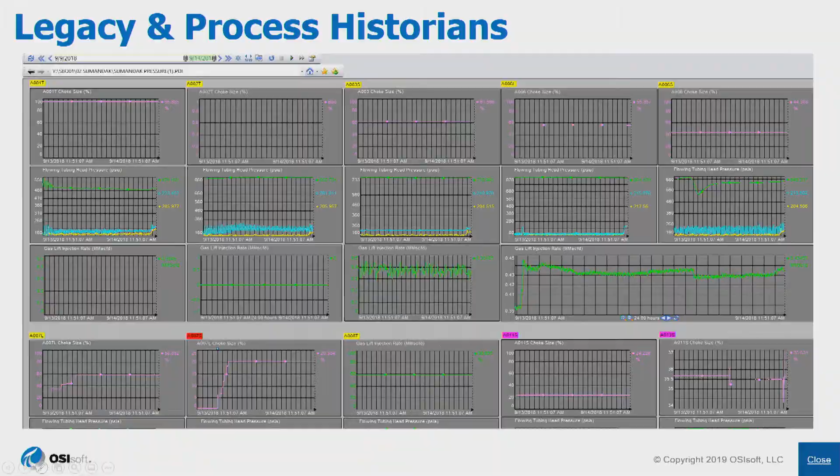And hopefully we would all look at this — even though I fully recognize that engineers love this kind of stuff and try to make these screens as big as they can with as many graphs — hopefully we would all look at something like this and go, it's not a very interesting way to monitor our facilities and get the most out of real-time data.

Okay, so the industry evolved into, in this case, what I'm talking about is something like a typical real-time refinery. And we could substitute the word refinery here with an upstream operation, a gas plant, or any kind of large industrial operation. But in this case, I'm talking about a typical real-time refinery.

And I think some of the examples we've been talking about this morning kind of resonate still with this picture, which is where a lot of the industry — although we may want them to be doing even more advanced things with real-time technology — I think it's fair to say a lot of the industry is still at this point.

So what are we looking at here? Lots of pieces of equipment that we're all familiar with generating real-time data — sensors, pieces of equipment generally connected through our process control environments and being collected into your Pi data historian at this point. And I use the term historian deliberately.

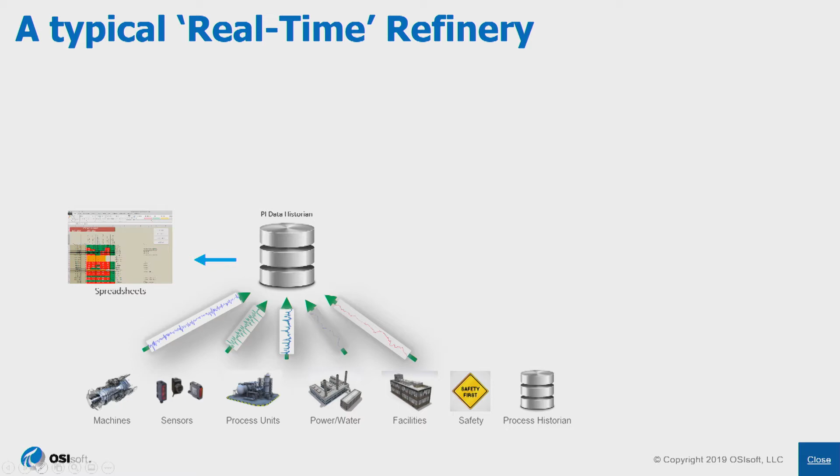And typically what we see in this kind of environment is our engineers coming to this historian database and exporting a lot of this information into Excel spreadsheets, spawning these like bunny rabbits all over their operations. And we also see, interestingly for companies like OSIsoft, our oil and gas customers going out to market and buying a whole range of specialist applications that they use to monitor their refinery, monitor their upstream operation, and link together with this real-time data, okay?

We've talked a lot today about integration between Pi technology and Sigmafine and how we can take our real-time data and stream it into this platform, and do mass balance calculations, energy reconciliation, gas transmission reconciliation, all these wonderful things we may want to do. This is a really big part of how the Pi technology has been used.

On top of that, as you're all aware, we provide within OSIsoft our own range of tools for DCS mimics, that kind of stuff, and process trending. So if you want to have a look at these trends in this kind of environment, you can.

Does anyone have any questions about this? Hopefully this will resonate with a lot of the room, and we all recognize this is a kind of thing that we've all been doing.

But the industry is increasingly interested in doing a lot more with things like analytics, modeling, digital transformation, all the terms we've been talking about. So when we look at this kind of traditional setup, which I think is probably going to be familiar from a lot of your refineries, there are quite a lot of challenges.

So what's the first challenge? Well, apologies to Sigmafine, because I would put them in one of these blocks on the side. But to us, the first problem with this is all these applications that you as customers are buying manifest themselves as effective data silos in your data strategy.

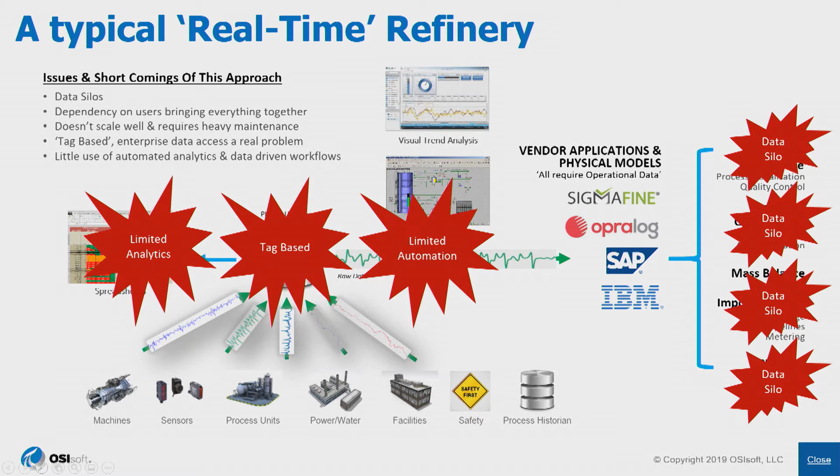The third problem is that within our real-time technology at this point, we have limited use of any kind of analytics or automation. So although you've got very sophisticated analytics, calculations, simulations, modeling in all these specialist tools, there'll be an awful lot of stuff you want to do centrally within your real-time data platform that in this kind of application you're not doing.

The sort of thing I'm talking about is, is a pressure rising too quickly? Is a temperature falling too slowly? Am I inside or outside of an operating window? All those kind of problems - things that engineers want to do at very high volume, at very high velocity across our industrial assets. In this kind of world, there's not much of that happening.

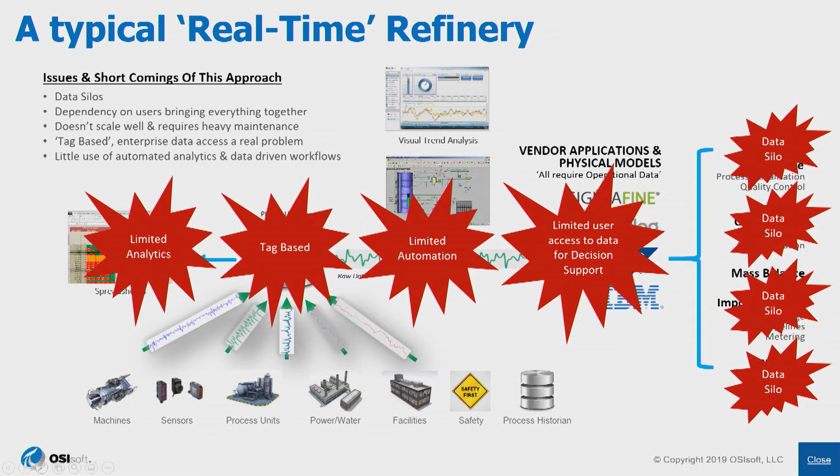And the final problem we've got here is that the engineers are still very, very dependent on third-party applications to do the things they want to do. So we believe within OSIsoft that actually the right strategy is a combination of specialist tools that they're going to be buying, but also giving tools to engineers that they can build their own solutions and complement the kind of sophisticated things they're getting from Sigmafine with maybe simpler things they may want to be doing to monitor pieces of equipment or processes or that kind of stuff. Okay, so we have some problems here.

On top of those problems around how do we move forward with digitization, what we're hearing from a lot of our customers is a growing appetite to do more with real-time data in the plants, in your operating assets. Everybody wants to do more. Everybody is waking up to the fact that if you apply technology in a smart way, you can save money, make things more efficient, make things safer, comply with government regulation, etc.

Whereas we as OSIsoft, if we'd been having this conversation 15 years ago, we would have probably largely been talking about monitoring operations, monitoring upstream production, digital oil field, those kind of things. Now I spend more than half of my life talking about maintenance and health and safety and real-time drilling and logistics and lots of other topics that previously we wouldn't have been talking about.

So the technology landscape is more complicated, and the things you want to do with our technology is more complicated. So we as a company have had to evolve.

Now, several years ago, when the industry realized that it wanted to start evolving, everybody started getting extremely excited about things like big data analytics and data lakes, right? And I can see you all getting immediately excited about the idea of talking about big data lakes and all this kind of stuff. And a lot of the companies that came into the market around traditional technology, like Sigmafine and like OSIsoft, said, this is easy. We can evolve this solution really quite simply. All we do is we stick a data lake on top of all of that, and that will solve all your problems. Just stick all your data into this, don't worry about it, and everything you need to do, all your digital transformations will exist in a cloud platform and solve everything you want to do.

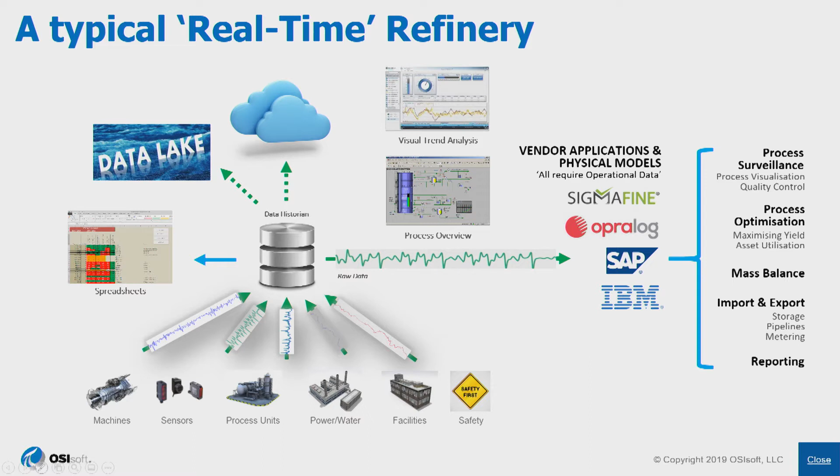But thankfully, we are now 2 or 3 years further down the line, and the industry has spent a lot of money and a lot of time kind of playing around with this in various permutations in lots of different companies. And they've kind of realized that there are still a lot of challenges.

So the first is sticking tag-based raw data, as we've been mentioning a few times this morning, straight into some large unstructured data lake is not a good way to provide access to data scientists or engineers around doing stuff with this data. You are creating even more data silos. So on top of all your application data silos, you're making your company even more complicated because suddenly you are introducing tons more data silos that may exist outside your own company boundaries or outside your own control. So this is a bit of a challenge as well. And there are, of course, significant data management challenges with all this kind of infrastructure and architecture.

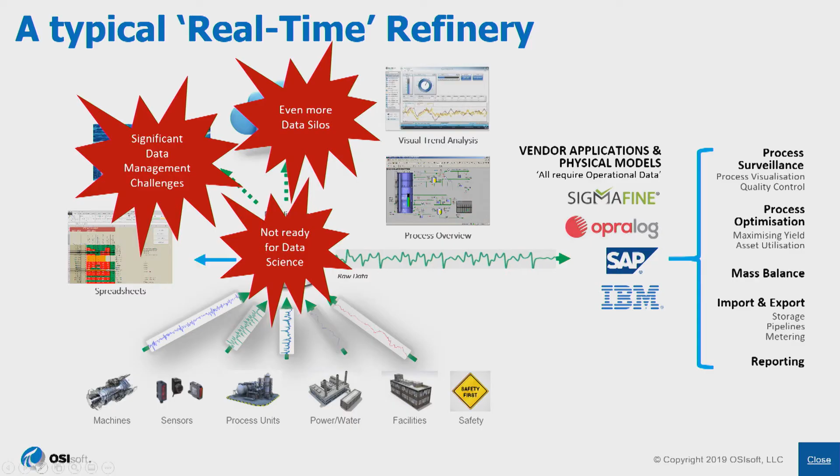Okay, so hopefully I have not painted too much of a miserable vision of the future of everything getting kind of far more complicated and we wanting to do more but struggling to do that. So the point is that we as a platform, Vlad has rightly pointed out, we've been around as a company for 40 years, or very nearly 40 years. We have obviously had to change significantly over that time.

And we've always been a company that's prided ourselves on our close relationships with business and operations users within our industrial customers. So we've listened to what the customer wants to do, and we've looked at the technology trends, and we've evolved our solution to be able to provide you all what we think is the right sort of technology to meet the modern demands within your refineries or your industrial assets.

So how have we changed? Okay, so seen as this is a PIMSoft conference, I'm well aware that you're all very, very familiar with AF, and or, as I like to refer to our sort of operational data model.

But the biggest change that we've made is we've moved away from tags as a way to present this information to most of our users, and we've introduced the idea of data models and digital assets through the use of PI Asset Framework. And we've talked a lot about, and we've touched on themes this morning, and we could spend 2 or 3 hours talking about AF and why it's useful and why it's important. But the essence of this is it moves us away from those raw tags and provides a framework for presenting data to people in a meaningful, structured, contextualized way that we can all start doing things useful with.

But it also provides a framework for data and workflow integrations between different applications, different tools, different systems. So as you want to complement all that raw data that you're measuring with your own calculations, your own formulas, your own references to other systems, your own references to third-party data analytics tools, predictions from models, whatever it happens to be, PI Asset Framework provides you the mechanism to do that.

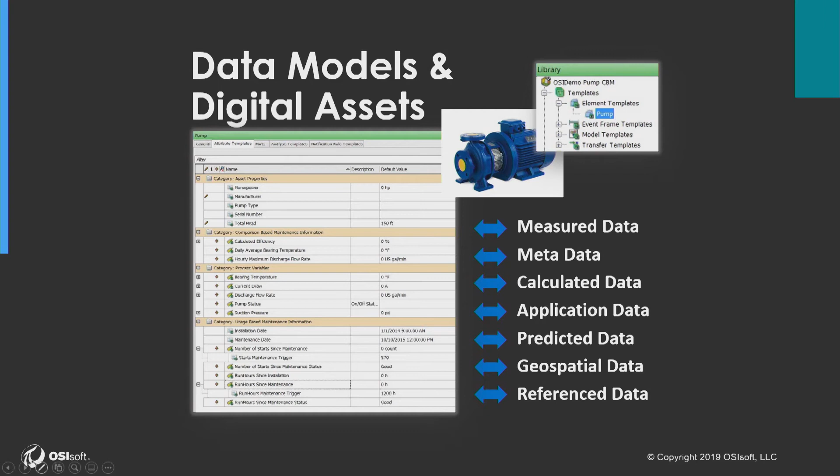Not sure this is working as well.

The second way we've evolved is our visualization tool has changed. We've seen examples on the screen today of PI Vision. To me, PI Vision is not just ProcessBook 2.0. PI Vision does something very different. It's designed to be a platform that engineers, end users, and operations people can configure themselves to start building those kind of decision support tools I was referring to a minute ago.

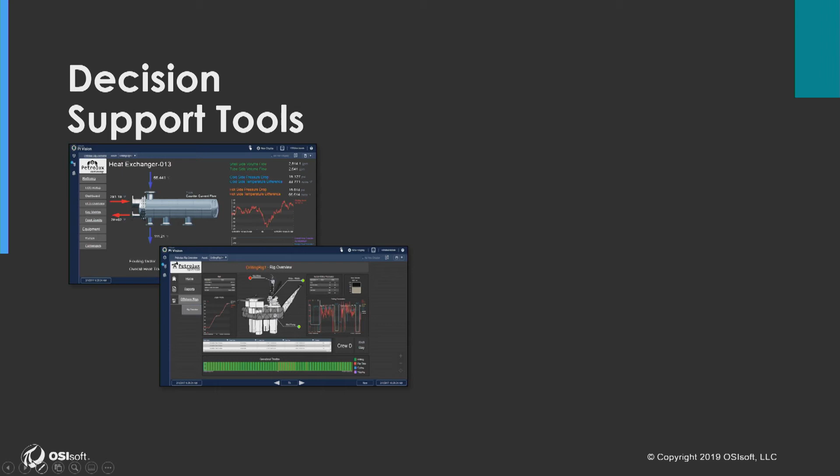So the idea is if an engineer has something in mind that they'd like to do with real-time data, they can use PI Vision in combination with PI Asset Framework and very rapidly build their own solution for monitoring a piece of equipment or working with time series data. That can complement the kind of advanced processing they're doing in something like Sigmafine. So this is an important evolution for us.

The third evolution is that we've recognized that you as customers increasingly want to integrate your systems and tools together. There's a bit of a problem where people spend their time flicking between lots of different applications, so all our technology now is designed in a way that can be quite easily integrated into other visualization platforms, or other tools can be integrated into our platform.

In this case, this is an upstream example from Petronas in Malaysia. The gray box at the top is an optimization model from Petex, and they've integrated that straight into the Pi platform. So the engineer is no longer having to export all his data out of Pi, push that into Petex, do an integrated model workflow for well optimization, then bring it back into Pi. He can do that all together in an integrated way.

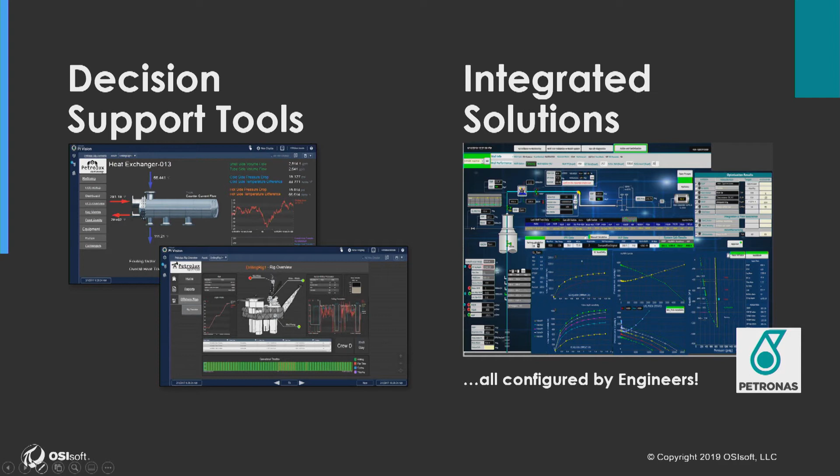So we're seeing more of this kind of stuff, and there are people in the room, like Philippe, and companies like Ipcos who are doing these kind of advanced integrations with lots of our customers around the world. This is an exciting evolution of this kind of technology.

Obviously we have to talk about data analytics, and although there are certain people in the marketplace who would suggest the answer to everything is very advanced machine learning and AI, I think as an industry we've all matured from this perspective, and we recognize that the answer is probably at different layers of different kinds of analytics to solve different types of problems.

We've got very advanced analytics that can help us solve very complex problems and expose insights into data that aren't immediately obvious, but we've also got the need for very high performance streaming analytics closer to the raw data, to help process that data, spot and fix data quality problems, and provide calculations, KPIs, and metrics as foundational building blocks used within those advanced analytics. So we've had to evolve to support different types of advanced analytics around the Pi system.

We've had to evolve to interface with all the business reporting tools, things like Tableau and Power BI. As a company we really don't mind what you work with, but we've had to evolve the Pi system so you can work with any of these, and there are new ones coming out almost monthly, if not daily.

We recognize that you want to connect your Pi system increasingly into your enterprise environment. You no longer want the Pi system just as a standalone system that someone goes in and looks at a trend in a control room. Now you want far more advanced integrations between your maintenance systems, ERP systems, and documentation systems, and you want these systems to reference and call each other in an integrated way far more than ever before. So we've had to modify and develop the Pi system to allow these kind of integrations.

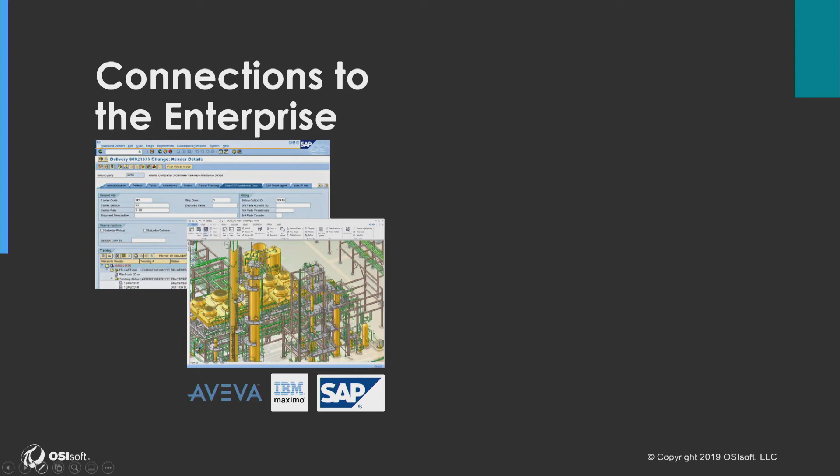We also recognize that you as customers want to do far more around data sharing. Data sharing between Pi systems, or between customers with Pi and other applications, has existed for almost as long as the Pi system has.

No longer do people really want to be in a world where they're opening up holes in firewalls or doing large exports into Excel spreadsheets and providing it to someone on a USB stick. We need faster, more agile, more secure ways of exchanging data between our companies, our service providers, and our equipment manufacturers. So the PI systems had to change to be able to do this as well.

And there are a whole bunch of other things that we've changed: IoT, or as we call it in OSIsoft, pervasive data collection, mobility, the support of things like digital twin technology. We could spend hours talking about all of these. There's been lots of evolutions in this technology, but the point is that when we talk about infrastructure, we're not just talking about that first diagram with the addition of PI AF.

We're talking about a different way of working between all our tools and all our different systems and all our analytics platforms. And I think the real message I'd like you to come away from my presentation today is to start thinking about how you are really implementing the concept of an OSIsoft data infrastructure within your organizations, and how that implementation can really help you do more with tools like Sigmafine from PIMSoft.

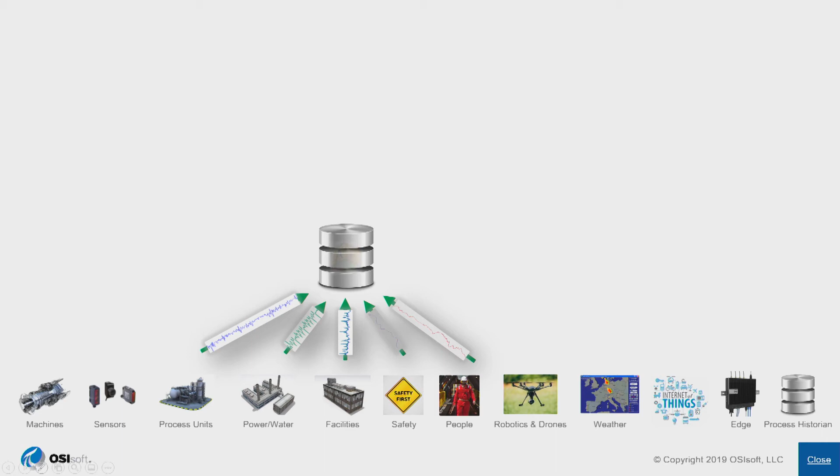So we've still got all this data, but not surprisingly, we're introducing our PI AF, our asset framework, our operational data model, that allows for far more sophisticated integrations. We are still suggesting very much that we are surrounded in a world with specialist applications.

But I think the most important thing I'd like to mention here is that this arrow is now bidirectional. And this is a really critical point, and I think it's maybe something we didn't touch on enough this morning in some of our conversations.

So all these advanced workflows that you can now do in Sigmafine and all these other tools, all these models, all these simulations - if that information is relevant to the broader organization, if it's a reconciled value, if it's a KPI, if it's something that someone else could use, you really should be bringing that data from these applications back into your central data platform.

Not just because we want to sell you more tags and we think this is a good idea. It really makes much more sense from a strategic point of view, which I'm going to touch on in a minute.

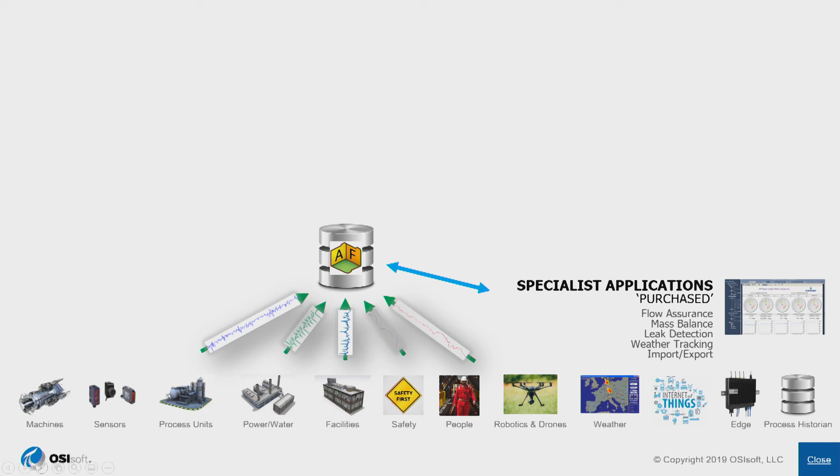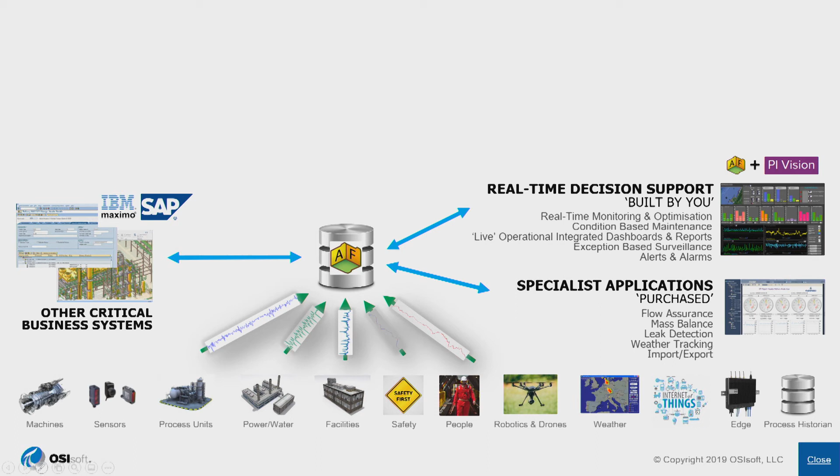Surrounded by this, not only do we have our specialist applications, we have those other business systems I mentioned, we have all the real-time decision support tools that your engineers hopefully will be spending lots of time building in your refineries.

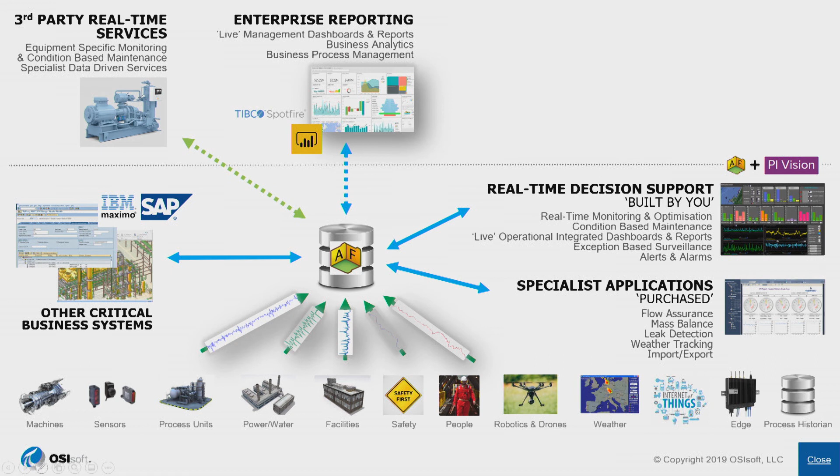You have your enterprise reporting platforms, you have your third-party real-time data sharing, all these services and equipment manufacturers exchanging data with them and doing advanced things in your operations. And you're obviously supporting all your data scientists, whichever platform they happen to be using.

And if you have none to choose from yourself, increasingly, and it was mentioned earlier, we have our own cloud services product, which is something in very early days yet, but in years to come, I think will mature into something really exciting in this space.

But hopefully the key point that you take away from this is that the PI system really is now becoming a central hub for all your operational time series data in your refinery. So try not to think of it in the old way, where we take data, we push it into something like Sigmafine, and then our engineers spend their life in Sigmafine or in PETEX or in any other application they happen to use.

There'll still be a massive part of that, and we're in no way suggesting that's not a big part of it. But there'll be a lot of stuff happening down here in these applications that you may want to, for example, put on a business report, or you may want to provide some information to the data science platforms. Or maybe you don't just have one model here.

Maybe you have multiple models, and what you actually want to do is send the data to all of them, get the results, bring the data all back into PI, and have PI do the comparisons for you between all these different models. There are lots and lots of really sophisticated workflows that you can do, integrating all these different systems together and exchanging data.

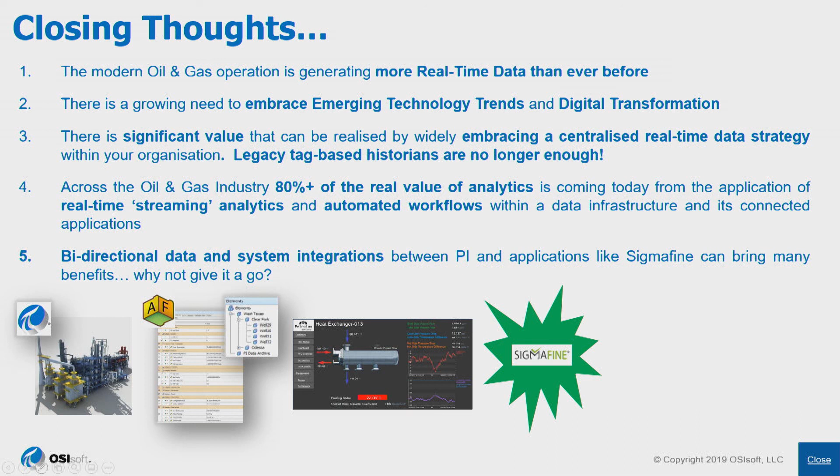We've talked quite a lot about advanced integration between tools like Sigmafine and PI and what you can do, and maybe some ideas that you could have for doing things in the future. And we've touched on a few examples, companies like ENI, Mol who are in the room, and lots of others that are doing this kind of stuff.